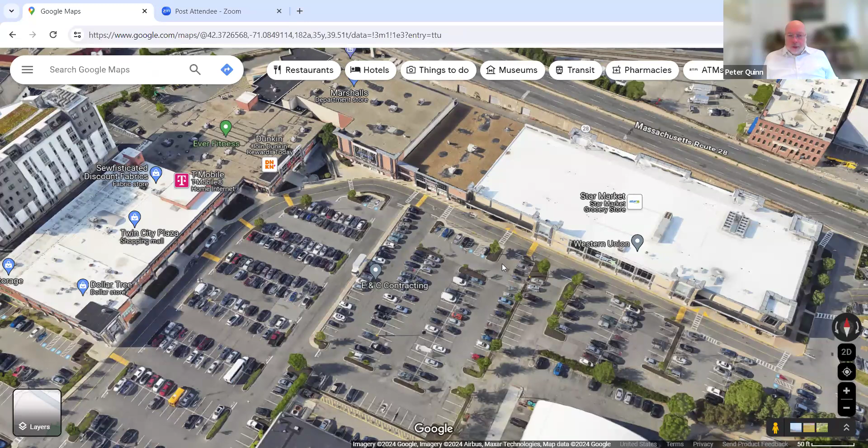First I'm going to give you a brief overview of the location, because it's a little complicated. Let's see, is the screen coming up? You see the aerial view of Twin City? Yes, we do. Okay, thank you. We're looking down at a large L-shaped building, many hundreds of thousands of square feet of retail space. The facades we're discussing face the parking lots and the streets beyond them. I'm going to zoom into this location to start the discussion. Back in the 80s, this building was modified, with some small additions put on, and modifications made to update the building in a style appropriate for the time.

So basically what the architects did is added directly to the exterior a post and beam system of galvanized steel, and then elaborated that at some tower elements with cornices. That became one of the main aspects of it. After you go past this first tower, you get back into a post and beam system of these applied galvanized elements, and then down here in the corner, where K&D and Dunkin' Donuts are, it got a little complicated with some unusual build out that would enclose these posts.

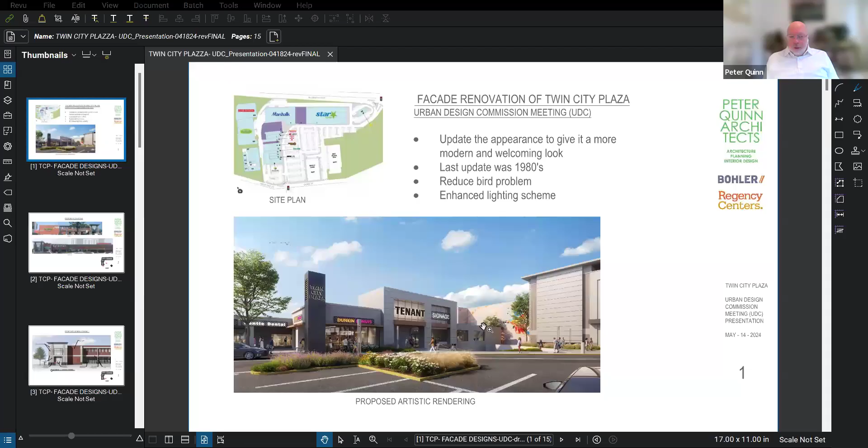As we looked at this conceptually, we considered how to modify this to make the most potent effect of updating the appearance to give it a more modern and welcoming look, reduce the bird problem—which has been a real problem for the owner because of all these beams and horizontal locations where birds can sit—and enhance the lighting scheme. Most of the lighting in here is old type fluorescent tubes or incandescent bulbs, so we'd replace that. The cornices originally had lighting in them, but they've either broken or been taken out.

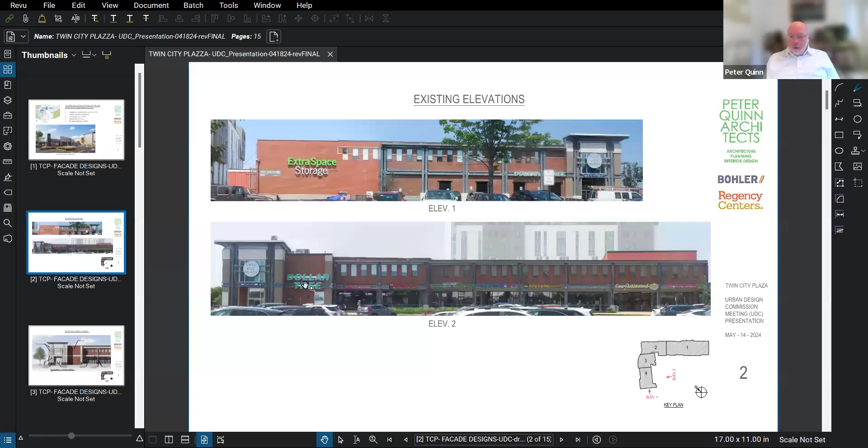With that in mind, we started in with a couple of different ideas. I'm going to show you three tonight, three different facade concepts, getting back first starting with this corner element and the general concept for how the post and beam is handled.

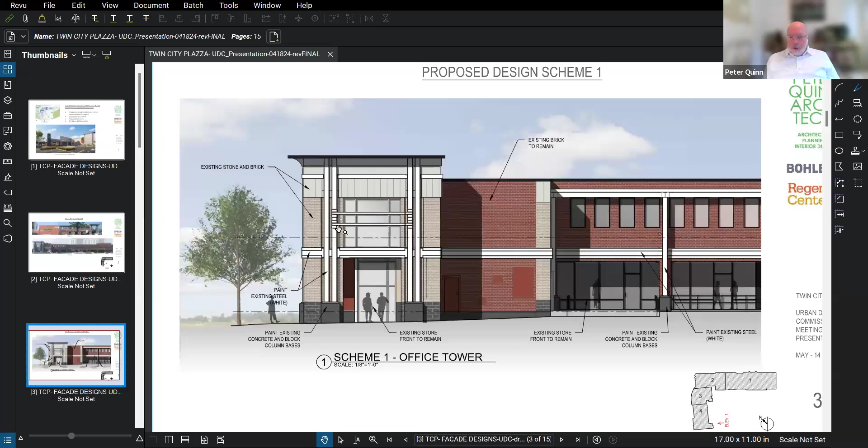So the first scheme is simply to paint out the beams and the columns to get rid of the kind of mottled galvanized effect. The existing brick would remain just as it is, cleaned up where necessary. The existing stone base, which is a kind of cast stone, would remain, but for the base of these columns, we would paint the concrete to give it a dark charcoal appearance.

And then going around the building, we would just simply continue with that, with painted out metal, transforming the galvanized into a white form. I realize this probably doesn't even require design review because you're free to paint your building, but there are some elements of this that do cause for some modification. So you'll see that.

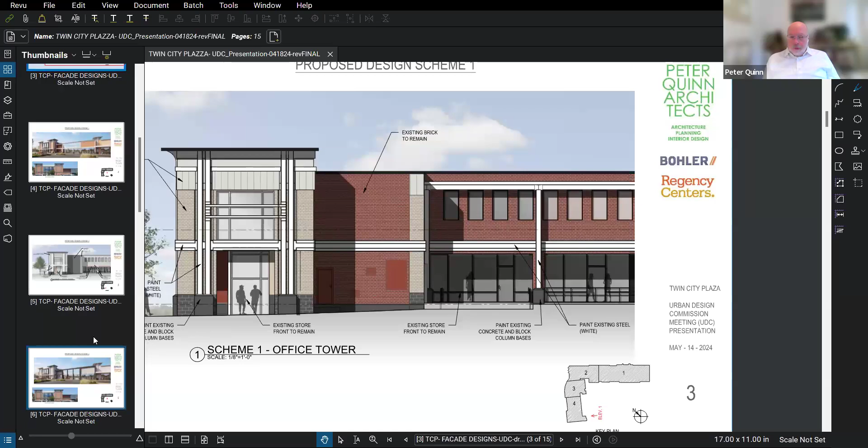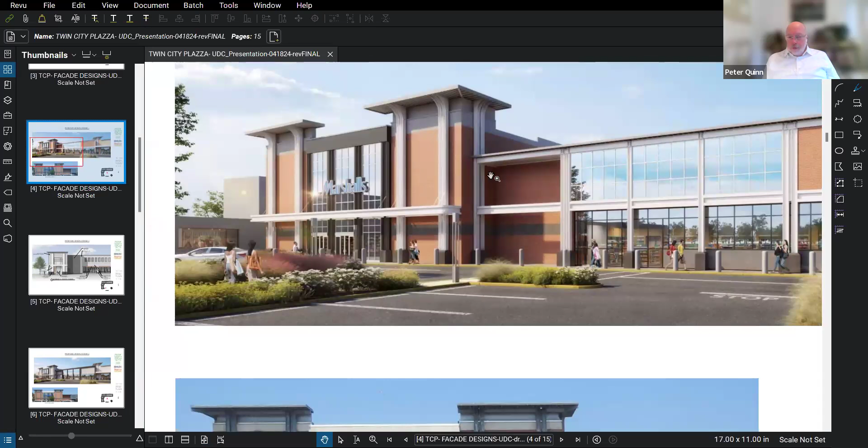Here's an artistic rendering of how that would look when you get down to Marshalls. You can see all of that is still there, all the steel columns, the canopies are all just painted, and the bases are painted as well. We would reinstall new LED lights up here in the cornices to get a nice dramatic effect at night. Those could be color modified. And we continue with this scheme going around the whole building like that.

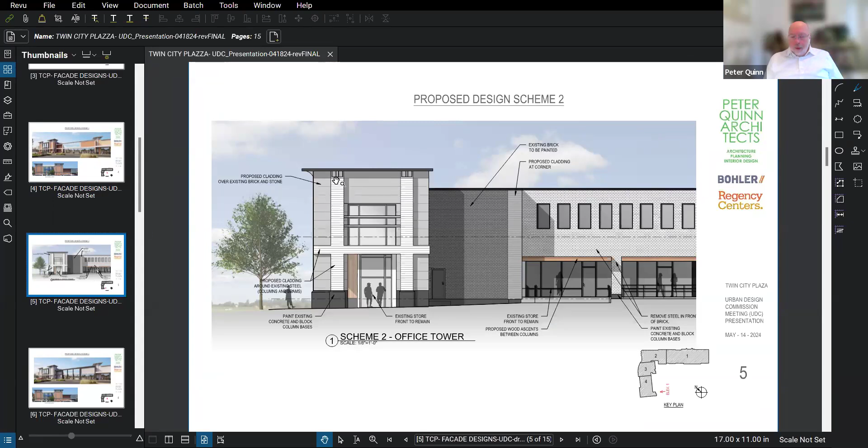The second scheme that we have is a little different. We would take away the steel posts and beams on the running lengths of the building. In the areas where we have the cornices, because these posts actually hold up the cornice and the parapet, we would just cover them with a metal cladding of some kind, a painted, factory painted metal cladding. We'd also probably cover the brick and stone that's there with a new, probably metal or fiber cement cladding of one kind or another. And then similarly, we'd treat the base with a dark charcoal color.

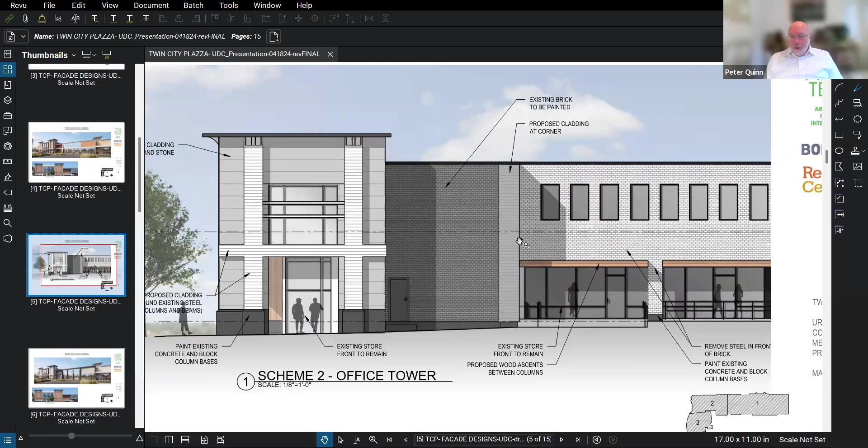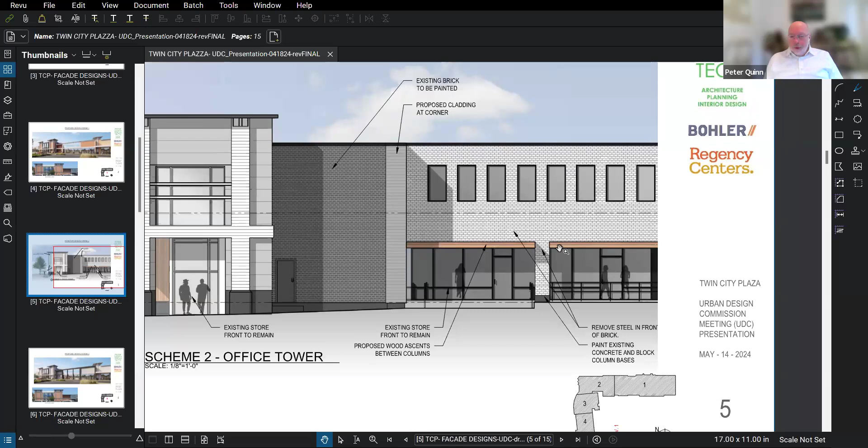A little bit of wood elements would be introduced around the entries. Again, the brick that we have here would just be painted. We'd have some cladding at the corner, and then we'd just continue with this kind of minimalist approach of painting the brick and having a few design elements to provide some nice effects. So the signage, which you don't see here, would all be placed above this wood edge here.

That is our scheme 2. This is another view of it done artistically. You can see all the columns. Some places we can't take columns away because they're holding up the parapet, and likewise that's how we deal with the corner as well. But in many locations, we're able to remove it entirely.

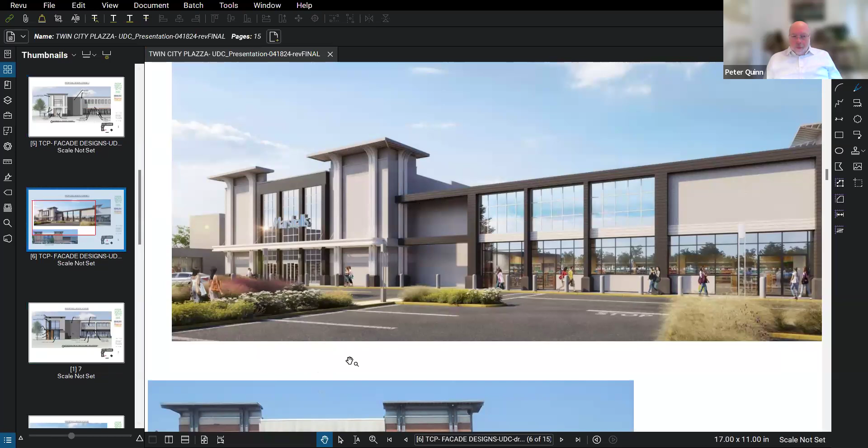The third scheme that we're going to propose is our proposed scheme, and I just want to make sure we can see it all. In this case, what we're doing is basically redesigning the outside image of the tower. This tower is the entry into the offices up above, so there'd be an entry on the 90-degree side that leads up into a stairway that's existing and leads to the second floor where Form Labs has a lot of their space.

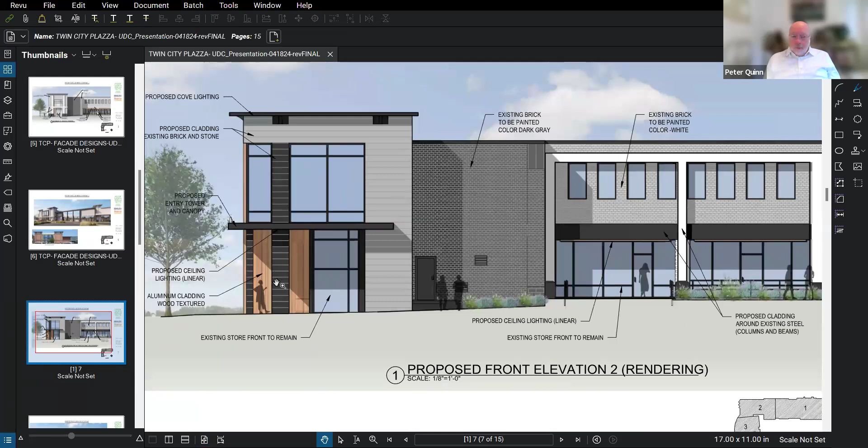We would modify all the elements with new cladding, including new fiber cement and possibly some aluminum cladding on the canopy. As you go around, we would paint this, and then we would come back to that existing post and beam system, and we would clad it either with a white metal or fiber cement cladding, or do it in a charcoal color. Again, the signage would fit on this signboard here, or be mounted on that.

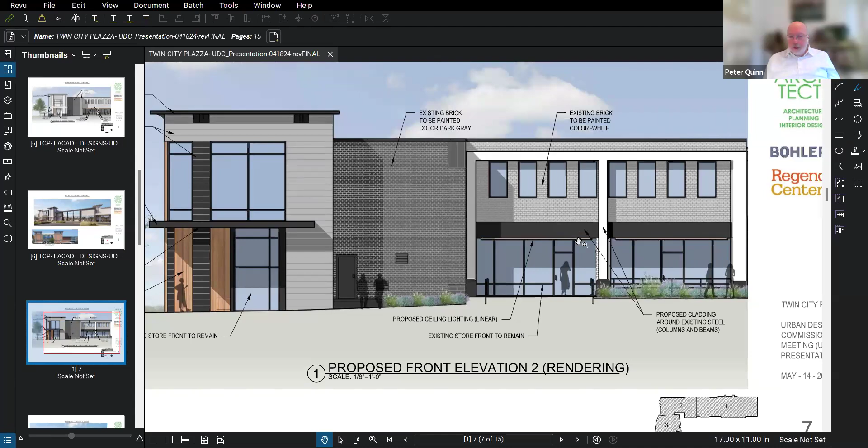Going around a little bit to see how that plays out as you go around the building. We would see something like this — let me go back to the corner for reference. You can see it is clean. The effect of the columns is much diminished because they're covered, and we have bigger, flatter planes that would have nice finishes on them. In most cases, they'd probably be fiber cement or stucco on these big expanses.

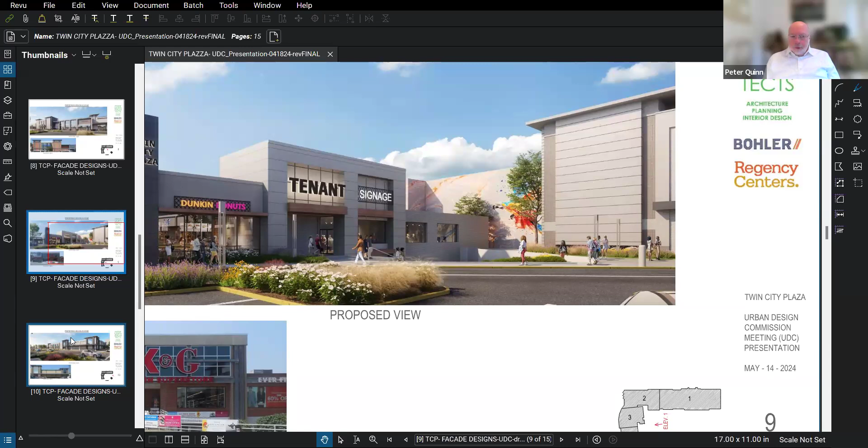Direct applied stucco. And we're going to leave some spaces here that are potential for murals — that's something we'd like to explore a little bit as the project develops. This third image here is also our preferred design scheme.

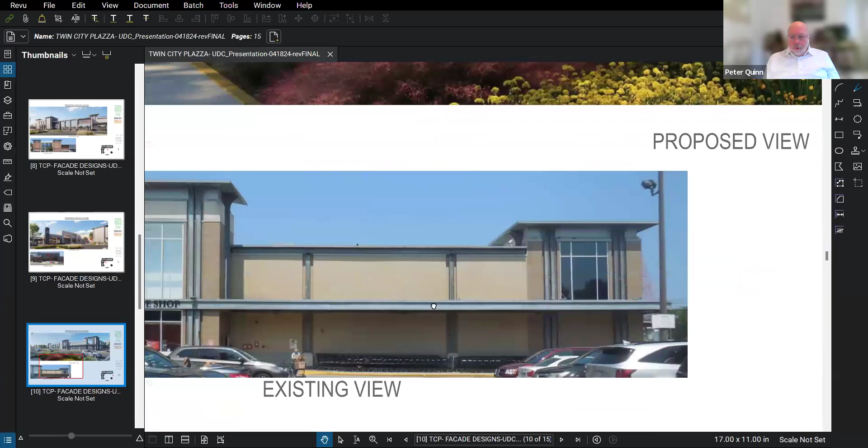You can see how it's played out in the canopy area, playing kind of an off-white against the charcoal and painted brick behind it, painted brick and cement block. Just to give you an idea how that works: this is the existing condition, and this is kind of the cleaned up, modernized version.

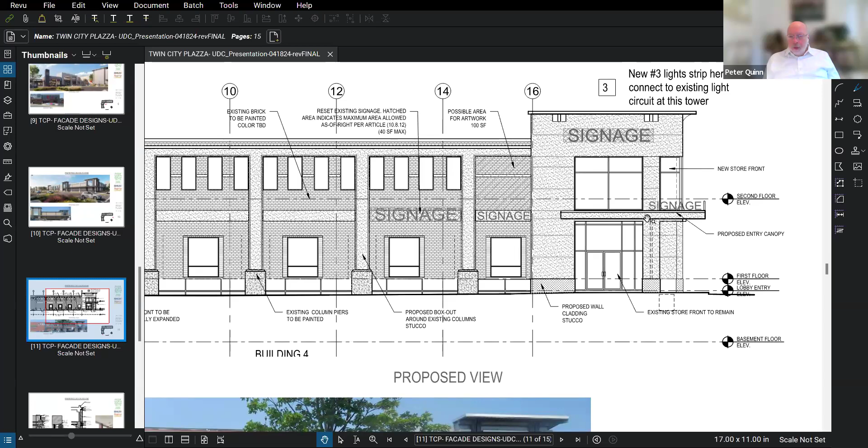We do have actually some dimension drawings that we submitted with this package. You can see how that would work. It would typically have signage on that middle band. We'd have lighting here in the cornice, as mentioned, and we'd have lighting underneath our canopies.

That's the basic lighting scheme as we go around. In this walkway area here, you can just see where it says Gentle Dental — this would all be relit there now. Right now there are fluorescents that would be turned into LEDs that are softer and kind of more even light.

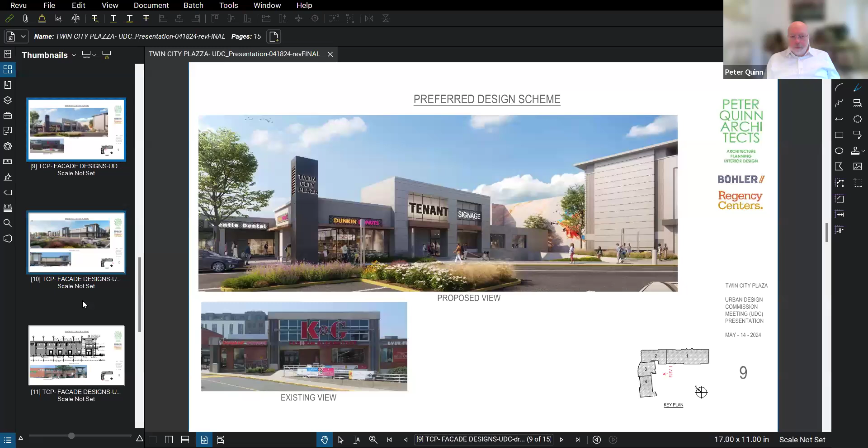That's this space here, you can see. We do have some site lighting too. We have proposed to — excuse me, let's go on to the next one.

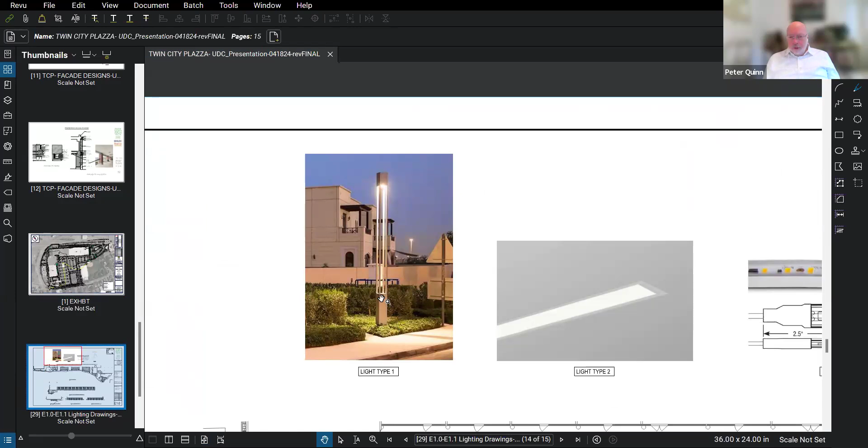We have proposed a tall area lighting fixture, something like this. I think this is still in the works as to whether this is the right one for the site, but something like this just to add a repetitive element to the plan, so we could have these centered around. This is actually the inside corner between the two legs of the L, and then this is the tower element here. We would have maybe about a dozen of these placed around the edges of the sidewalk.

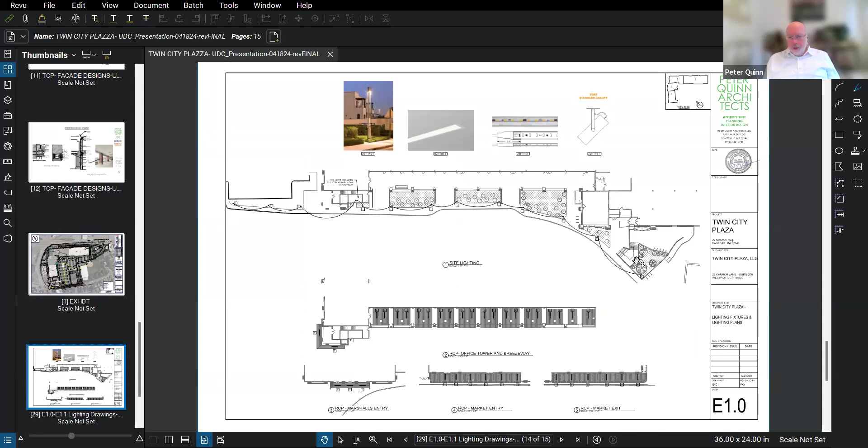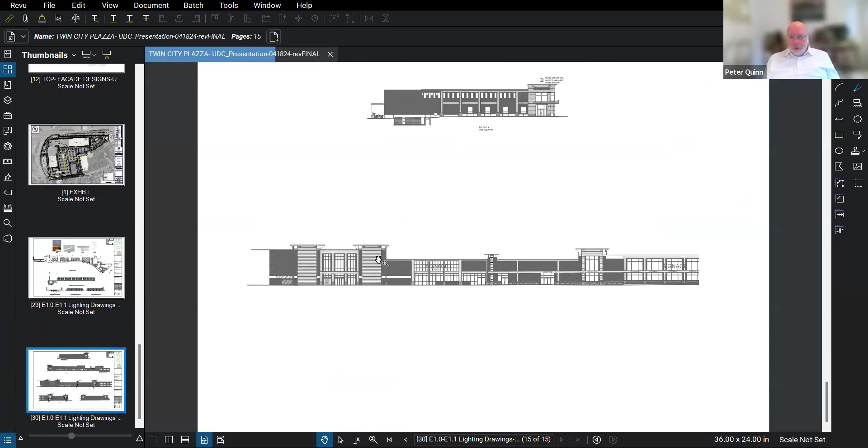If you'd like to see how this whole thing plays out on all the elevations, this is in your set — there's a kind of technical 2D elevation of all the different sides of this with the preferred scheme. So you can see how the signage sits there, and these are clad out, as I mentioned.

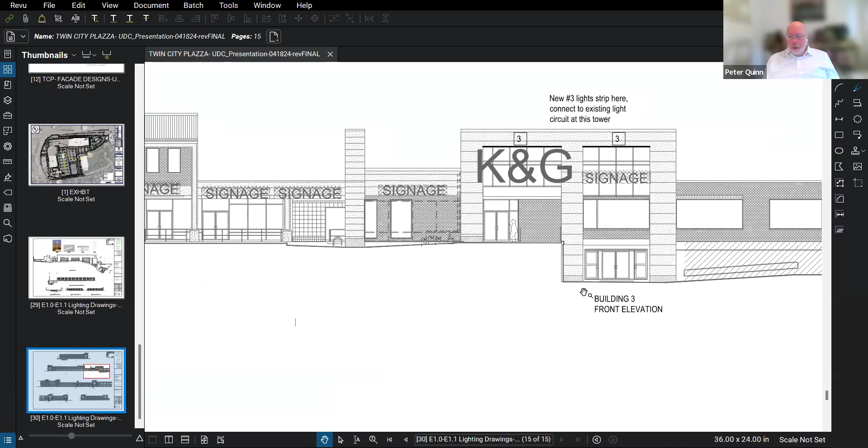And then when we get into the area around Dunkin' Donuts, we build a small element that's just like a signage tower. It's matched in height to the K and G sign, and of course this is all cleaned up and sort of made more regular.

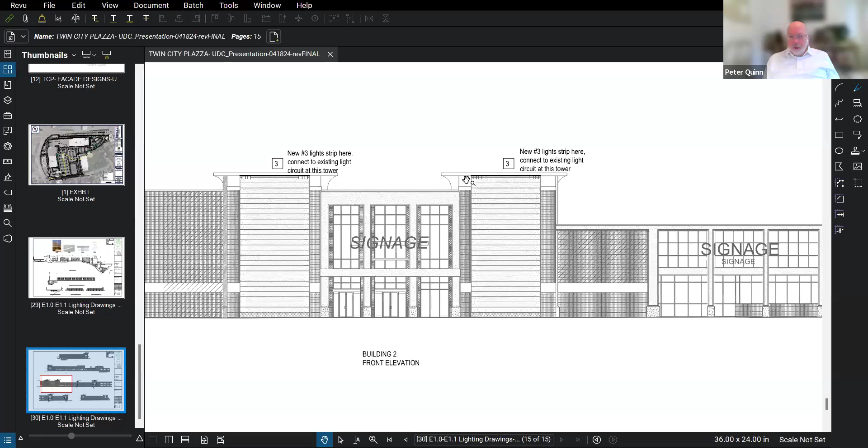And as we go on the long way again, the vertical posts are all clad here, and then the space in between is filled with the fiber cement or stucco, as I mentioned. Again, we would put these light strips up in the towers to light the corners.

How it goes across the whole way. And then we get to the corner. These are all canopies in here. And once we get to the corner, we turn, we take it out to McGrath and end it there.

And so that is the presentation. I know there's a lot there. It's like, you know, you can have a concept, but then when you get to all the little details of how it fits together, it can get quite complicated. But I hope I've given you enough information to understand what we're trying to do.

Thanks. Peter, yeah, and I think the first concept you showed was the preferred scheme, correct? No, the third one. Third, yeah, labeled right here, preferred. Great, yeah, thank you. First concept was painting only. It's the preferred.

Yeah, I think this is going to be a big improvement. And I think the third alternative is not only the most successful, creating a more successful public realm, but I think technically it's probably better. You know, old galvanized steel, you try to paint that, it's not easy. You're not going to be happy with the results, and it won't have the longevity that the project needs. So even some of the cladding, I think, might be a little challenging.

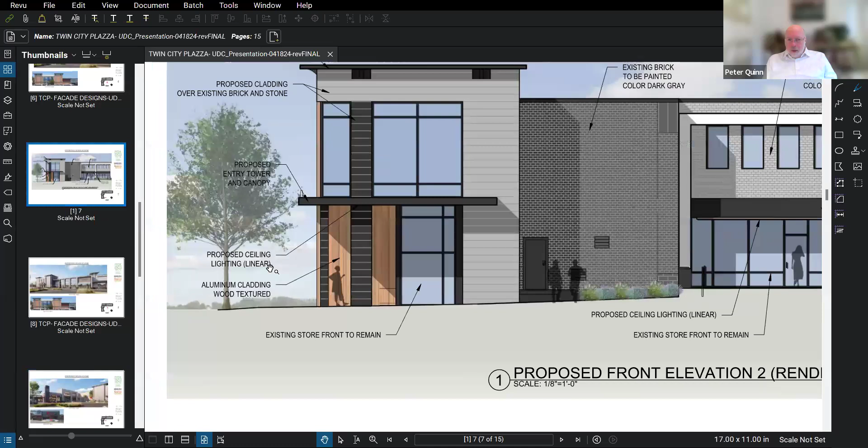One question: what are you cladding the steel members in? Yeah, okay, let me just see if I can find the exact note that we have here. Columns and beams, yeah. So we would probably do this with a fiber cement. It's possible we could do it with a stucco as well. Stucco would be direct applied to a hard surface, not an EIFS. We'd get nice crisp lines, whereas with fiber cement, there'd be joints, there'd be outside corners.

Yeah, there would be some joints, absolutely. It could be painted out. I think we'd prefer to do it in stucco actually, because then you get a more monolithic feel for it, and you can really get some nice crisp edges that you wouldn't be able to get with the fiber cement as easily, because you've got all the clutter of joints everywhere. I think that's what you're saying as well, Tim? Right? Yeah, I think those as monolithic elements are going to be preferable, rather than fiber cement. And then it's a question of what fiber cement product and how do you treat the edges? Is it a through body color?

In reality, there's either sort of residential level fiber cement or there's very expensive commercial stuff, and not a lot in the middle. There are a few products, but they're not as flexible as we'd like, you know.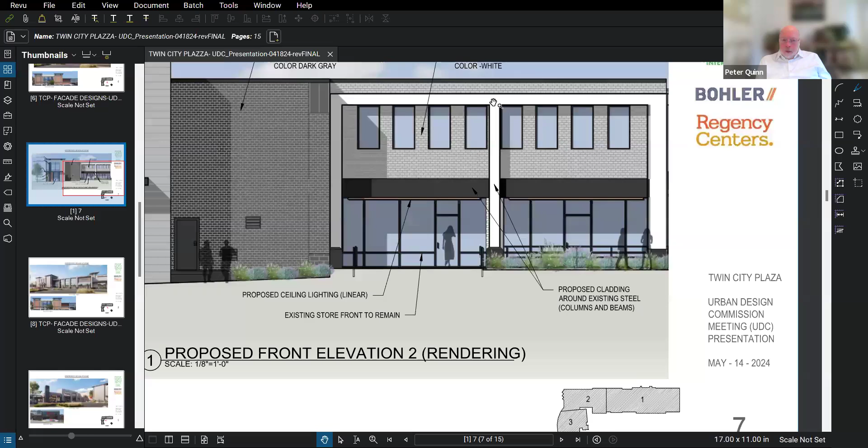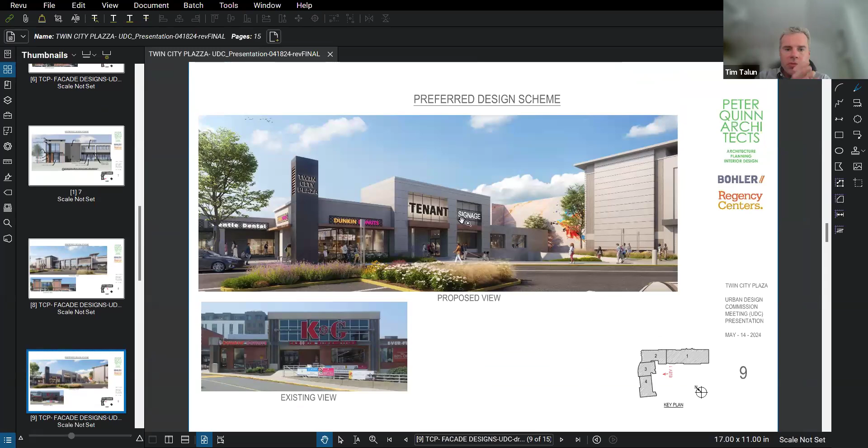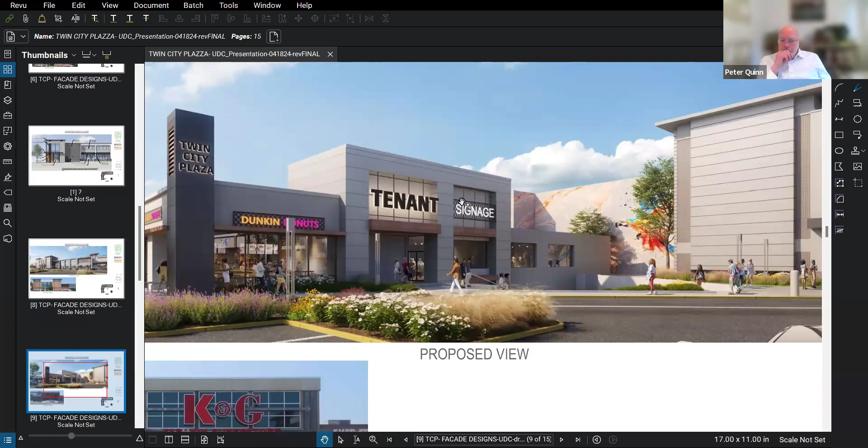Another question was about the area around the Marshalls and the K&G. At the portion that's up on the screen now, around the K&G, you're changing the massing of the building there, so you're building it out. And in those locations, introducing a new material probably makes sense because it's a new building. If it's a stucco, then it's coordinating with the material you're using elsewhere. I wonder about the portions to the left and right of the Marshalls, and maybe even over by the Shaws if you're doing it there, where you're cladding the brick with the stucco.

I'm wondering if you explored just painting the brick in those locations. Yeah, that's a good point. That would be sort of a hybrid of our second scheme with the third in this location, and that is definitely a possibility.

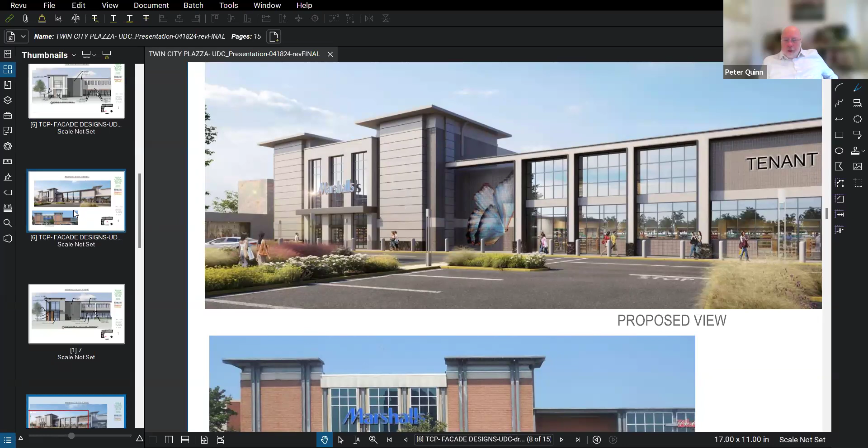They're really both good, I can't really explain why one is preferred over the other. This is a second scheme where we just painted in here, but we left the columns intact. So I think what you're saying is why not just leave this surface in here and then do what we're proposing with the columns.

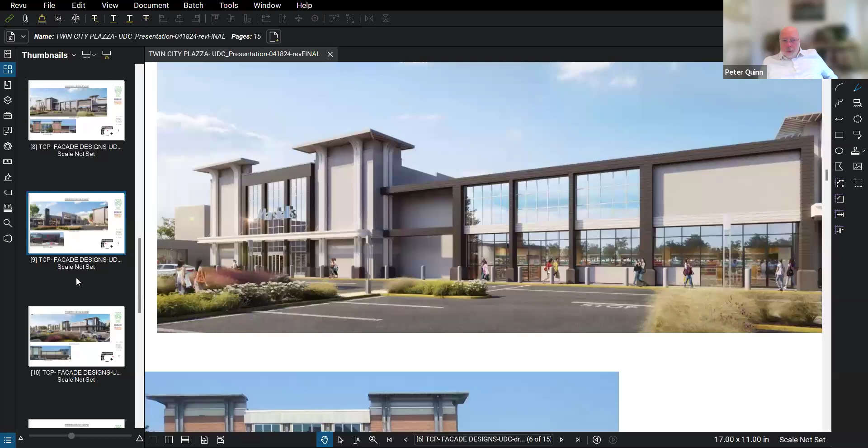And yeah, that could work. Let me see if I can get that. It's a preferred scheme.

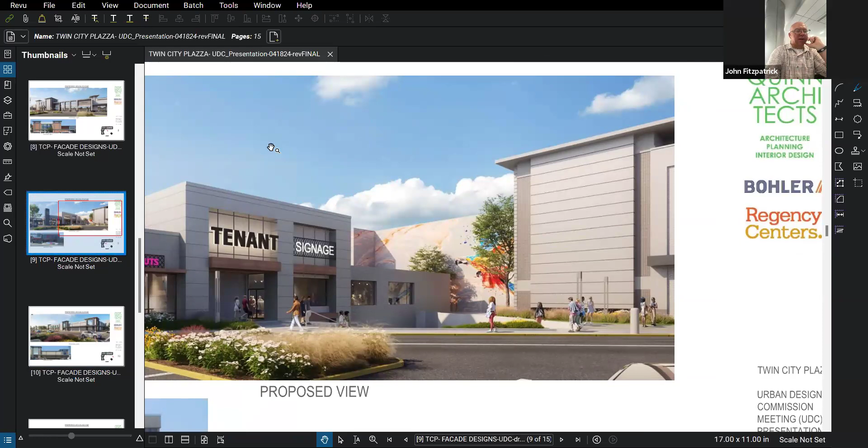Yeah, I would say the second concept, still wrapping the columns, that aspect. We can do a different program between the columns. This is on the rendering here, you're seeing one version. We looked at many before, as the owners, before we kind of dialed this program in, and kind of felt this was a good middle. But there's definitely optionality left and right on that opening.

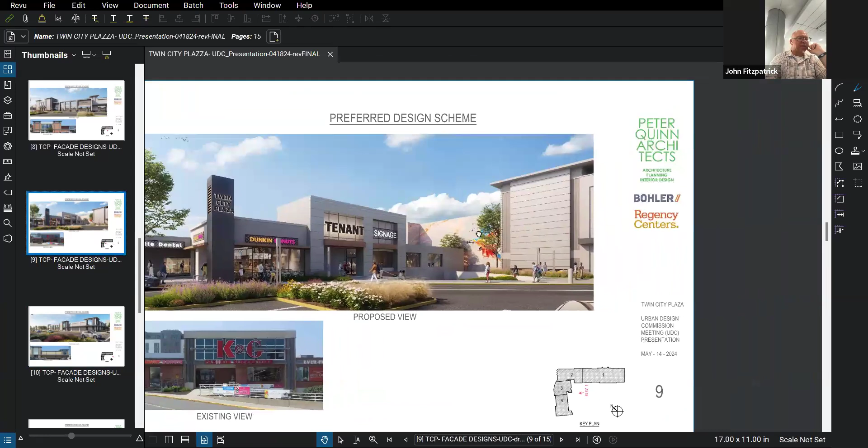Existing surface here underneath this projected wall is a corduroy cement block. So it's not super attractive, but definitely is dated. That led us to the idea of filling this in a little bit.

I think the brick there, the high quality material, painted brick can be quite nice. Something we did at the Timeout Market over at 401 Park in Fenway. The whole atrium there, it was a yellow brick, turned white. It turned out great.

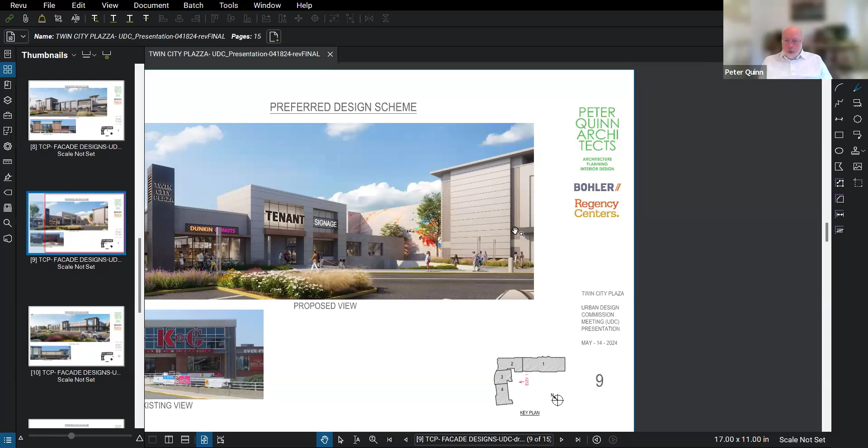Okay, well that's certainly something we can consider. Make it a recommendation. So maybe in our recommendation as the UDC, we just note that it could be option 2 or option 3 for that portion. Yeah, exactly, your discretion.

And you're not replacing the windows, correct? No, we're not touching them.

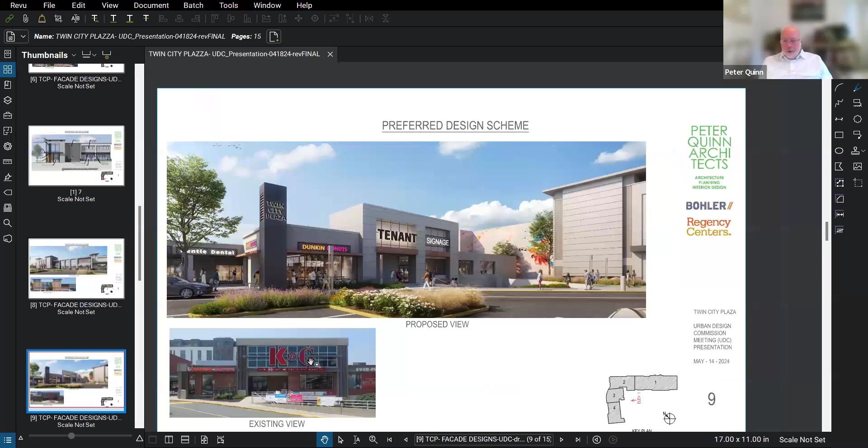I think around the K&G, with our preferred scheme, this is just spandrel glass, or just glazing that has a film in the back or something, but it's okay. So that is going to be replaced, but it's not really glazing per se because there's nothing behind it.

Can you talk a little bit about the landscape that you're showing so beautifully in all these renderings? I didn't see any plans that reflected it, but I'm curious because they obviously make a massive difference on what the public realm feels like. Yeah, the landscape here has taken some beatings over the years, between the winters and plowing and people driving over it. We are not actually submitting a redo of the entire shopping center with those kinds of changes.

That may be a future phase, or may not, I don't know, but we're just trying to work with the existing. I believe maybe John can speak to that. John Fitzpatrick, who represents the ownership, could speak to whether there are plans in the future to deal with some of this landscape on the site.

I would say that there's plans to reestablish plantings that should be there, probably better portrayed by the imagery that's there, that may have deteriorated over the years. I would imagine that we would reestablish a lot of the landscaping back to what it was supposed to be, that is in the permit set, the original permit set.

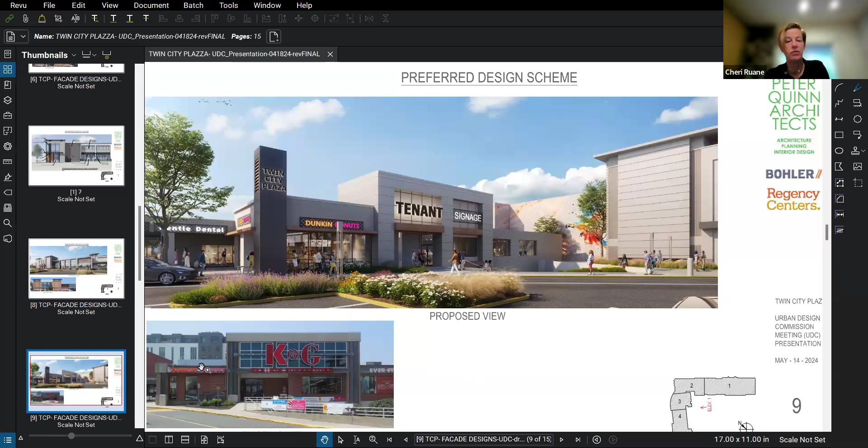This is an incredibly robust and diverse planting plan, which would not be what the original permit set was at all. I'm sure it was yew bushes and junipers, and this is a very different aesthetic. So even next to the buildings, it's giving this illusion of planting between pavement and where people are occupying, and that's just not what you're proposing.

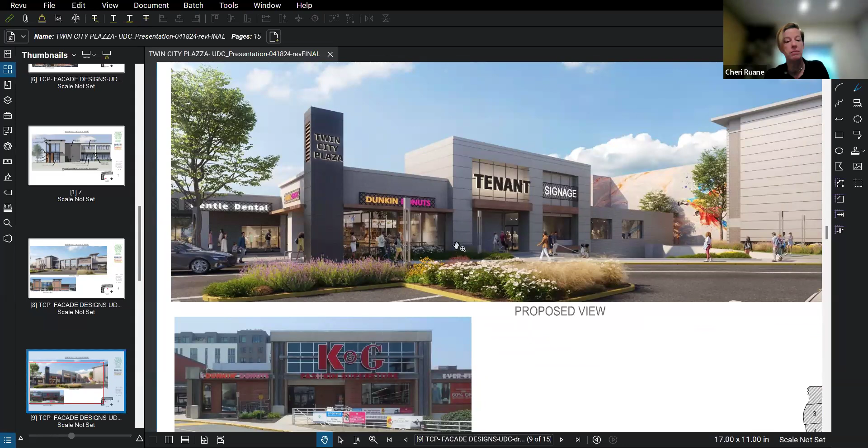So I just offer that this is no small contribution to the overall aesthetic of these renderings, which are lovely. I agree with all the comments that have been made. I think the buildings will look great, and the landscape is a dumpster fire right now, so investment in that would be helpful, because it would also help with stormwater management.

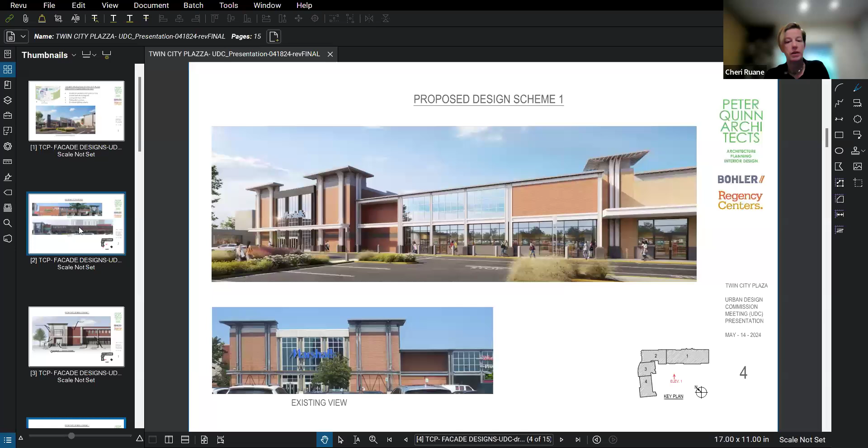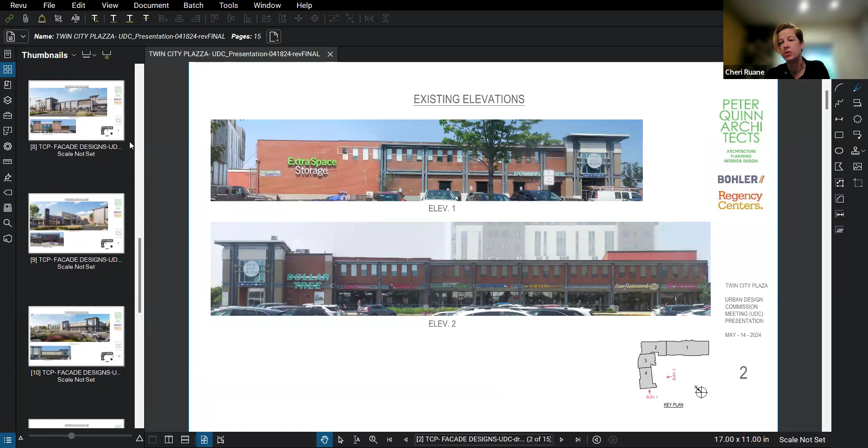Right now, all these islands are pretty compacted. Nothing is being absorbed in them. So all of that would be a worthwhile investment in considering native species and pollinators to help contribute. This is a massive lot with a lot of space that could be pervious and helping to mitigate stormwater infiltration. I know that's not a part of your project, but you sort of opened it up with the renderings, so I couldn't help but comment. Point taken.

All right, are we ready to take a couple of votes, Commission? Is there anything else that we want to ask? All right, I'm seeing shaking of heads. So, as this is a facade change, I don't think we need to take a vote on a massing option, since the massing options do not seem to change. But correct me if I missed something.

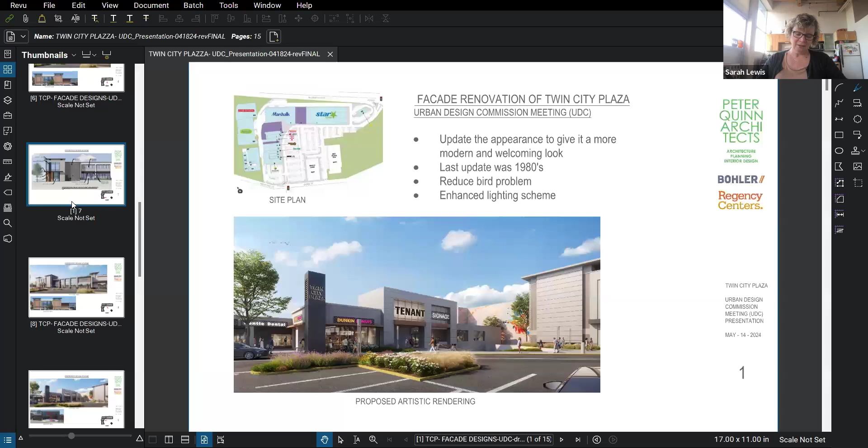So we are going to not take a vote on massing since that hasn't changed, but we will take a vote on preferred facade. So can I get a motion that the preferred facade as presented is the direction to go in, with further clarification that direct applied stucco, not EIFS, will be the preferred finish on the steel members to maintain the monolithic element look and the crisp corners.

And then at the Marshalls facade, it'll be painted brick instead of the stucco panels with the clad columns to continue the preferred option. So for clarification, I thought those were suggested alternatives to consider for that option, because I worry about technical design issues - I don't know how you deal with energy code and stuff.

I don't know how difficult a design problem this is going to be, but I feel like a good technical solution might drive which alternative you all use. I don't know, do my colleagues agree with that?

I think yes, but I guess I'd ask the applicant if there's any concerns about those modifications. I agree that painted brick could be a success or it could be a significant failure, but there's painted brick proposed all over in the scheme, so I would assume it's just the same paint system being applied to the brick elsewhere. But I guess that's a good question for the applicant - is there anything else beyond just aesthetics driving the decision to add stucco over the brick?

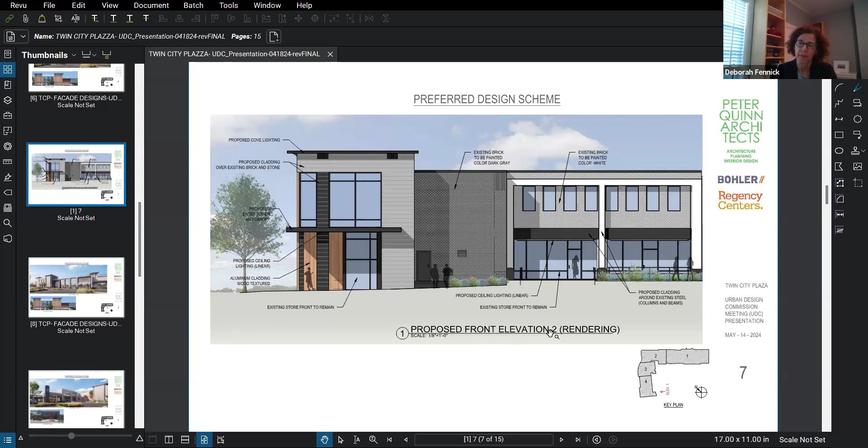And I'm more worried about steel. Are you talking about at Marshall's entrance, or are we talking about somewhere else? I think we're talking about right here on this surface.

Yeah, I think we could clad it and paint it just like we're doing everywhere else. I want to study it a little bit, but the way these columns were put on before, there are some locations that have real water problems where the water gets behind the beam and post and then channels down into the base, and causes some issues, and there's also litter that gets in behind there and birds nesting and so forth. So we'd like to be able to clear it off as best as possible - that's one of the things leading to this solution here.

But certainly there are other ways to deal with that stuff, and I'll talk with John and see if we can come up with the best solution. But I think you see the range - how do we deal with it, either with the stucco banded panels or with just exposing, taking the columns and cladding them, and then painting the brick between the two.

So I'm going to propose to the commission we leave that as a separate design recommendation, and then we'll take the vote on whether you want to include the clarification that you preferred the stucco on the steel members, or the preferred option.

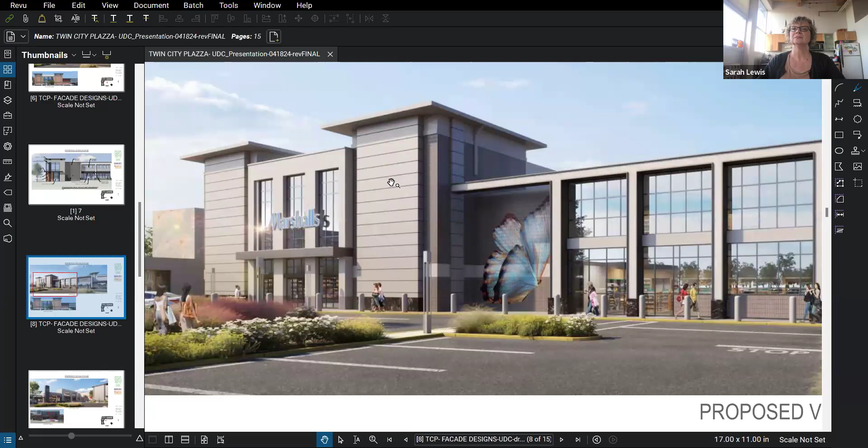I would defer to the architect who knows a lot about the challenges. I would be fine with a couple of solutions. Are you okay with that? Yeah, that's fine, maybe.

We have studied it quite a bit on the columns and the running beams, and I think stucco is really the best solution because there's a lot of variables in the surface texture, and the stucco with a backing on a metal channel allows us to take into account a lot of variations. So it can be fairly easy to manipulate, and we get to work with colors very well.

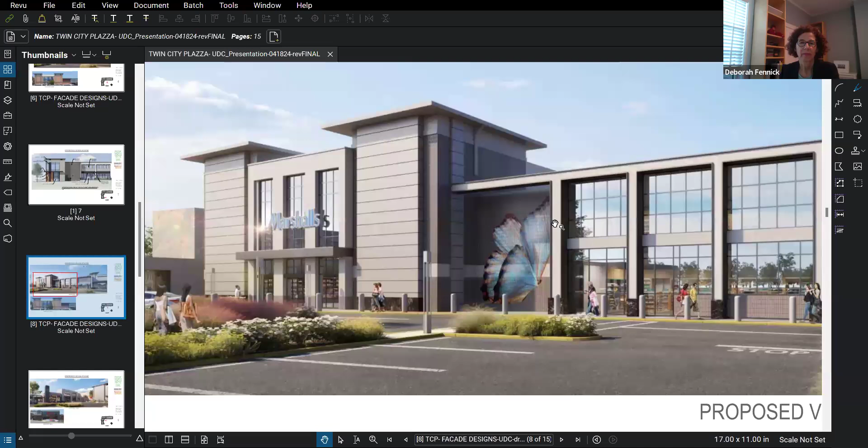I don't know if you notice here, but the way we've done this is the inside of these columns are actually done in gray. So it's a way of creating a kind of visual contrast between the front surface and what's on the sides.

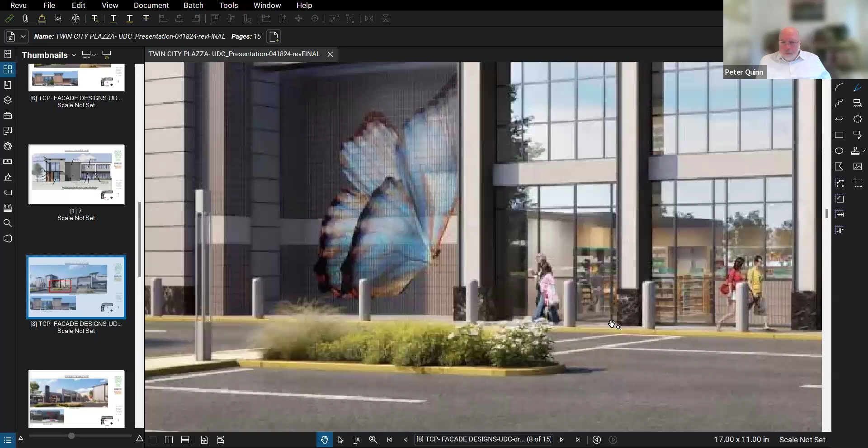I would note that at the bases of those columns, you're still working with the same hard, solid material down at the ground level where people are touching. That's not proposed to be stucco or anything like the sides. It's actually concrete. That just needs to be redone, and we worked up and cleaned up the panels. That's a cast concrete base applied right up against the wall.

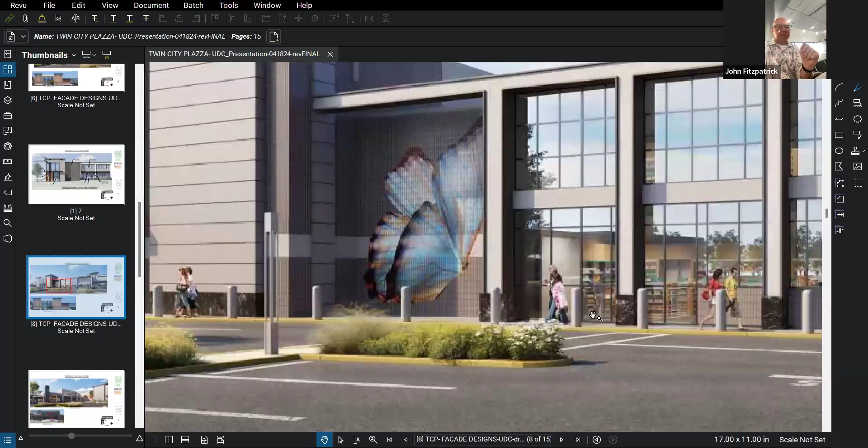And I think you made mention before, Peter, about some of the murals. I see the one we have in there, on the plans. We are proposing to do a number of murals.

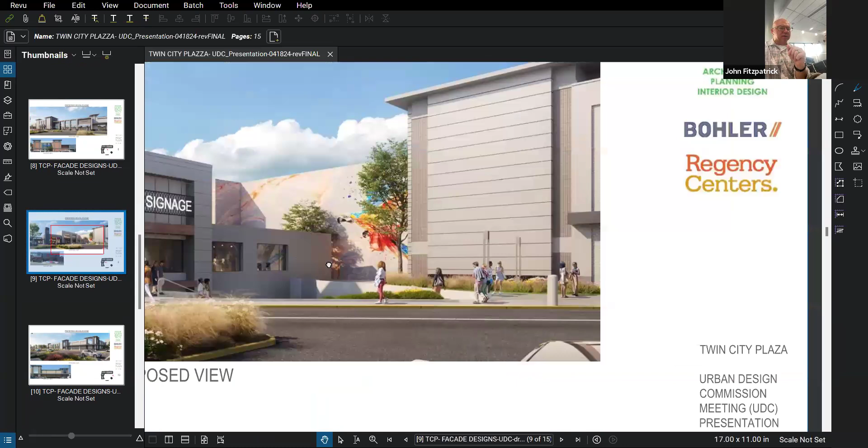There's a maximum square footage allowed by the zoning ordinance. I would imagine we hit that maximum allowed, and we have some suggested areas on the buildings we're considering. A little bit there, a little bit to the right, and maybe a little bit down by Dollar Tree as well. So 3 or 4 different locations. I think we are sprinkling them in our preferred concept, and we'll try to come up with a very good scheme that is tastefully done in the center.

Will you be using local artists on those? I would imagine we will. We did a similar thing at one of our other projects using local artists down in Cambridge. That would be great. Yeah, that's great.

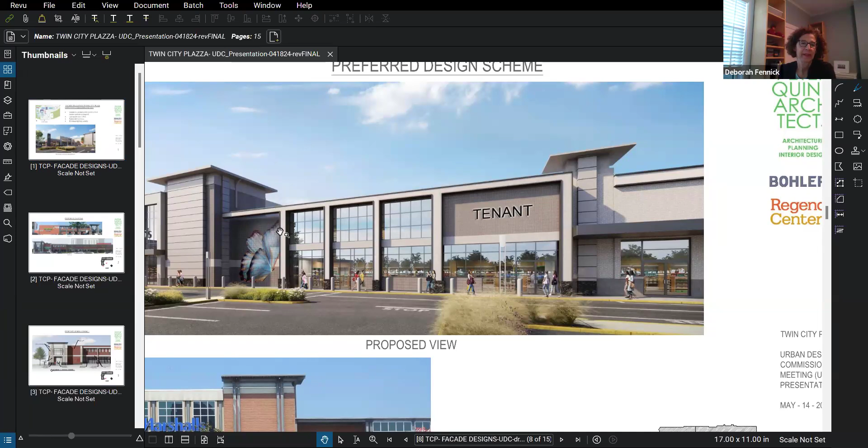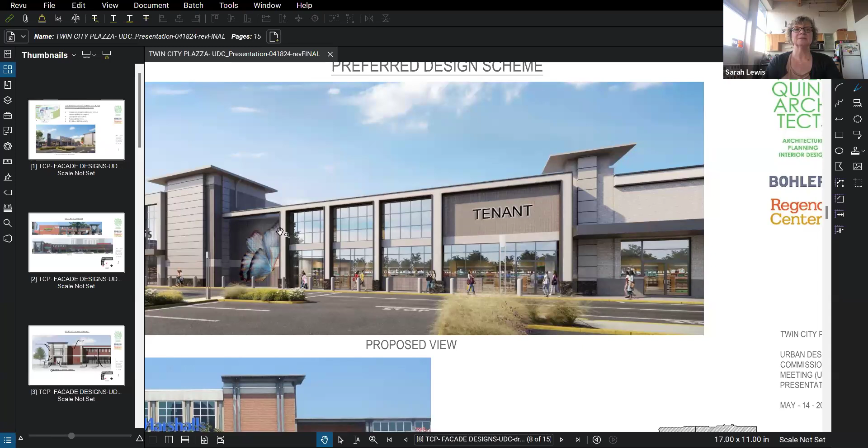All right, so then we're going to keep it simple. Can I have a motion that the preferred option is the direction the commission would like to go in? So moved. Moved by Deborah, seconded by Tim, roll call vote.

Tim Talon, yes. Deborah Fennick, yes. And Sherry Royan, where are you? Oh yes, there you are. Sorry, I'm here, I lost you on my screen. Yes. All right, so we have a preferred option.

Second motion we need: does the commission believe the design guidelines have been met for a CB district? I don't know the answer to that. That's a good question. I think this may be the first CB project we have reviewed as a commission. There aren't too many CB zones. Yeah, that's kind of what I was going to say.

Sarah, would you be able to maybe give an overview on that? I don't have the ordinance open in front of me. Let me pull it up now. Maybe Adam? Let's see who gets there first. All right, let's see.